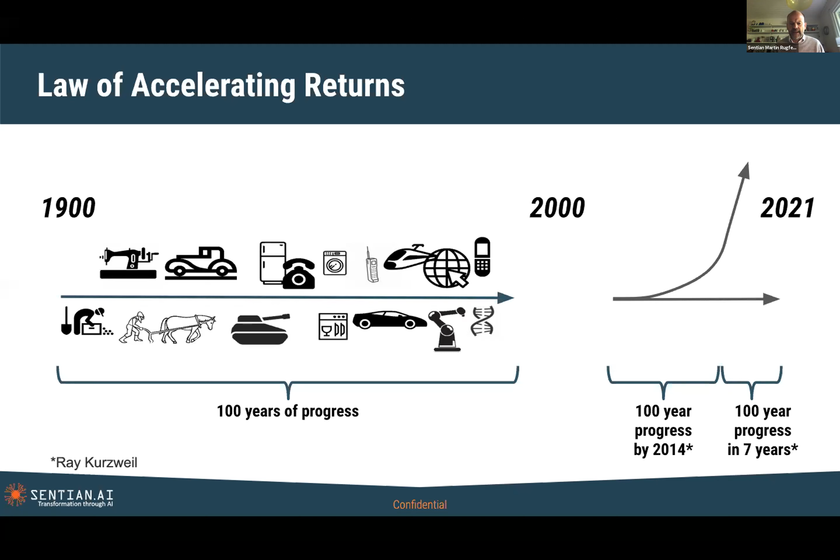So I think there is a reasonably interesting question to ask of everybody. Where will you be in 7 years' time?

And if we take an AI perspective on this, AI is now seeping into all solutions and all areas of all businesses. And there's a lot of things going on. If you take the amount of development that's made in the AI community in the US or in China. China is, by the way, one of the countries where most of these new patents in AI are being created. So it's really interesting to see how the technology is evolving.

And if you want to be at the forefront, you better get on the train and go with it.

So the theme today is smart industry and industry 4.0. And for us, industry 4.0 is really about speed and efficiency. So how does that stack up for the industry today?

Well, if you look at incumbent automation and control systems, there are some challenges. The industry is really a high dimensional place, which is non-linear, it's stochastic in its nature. There's a lot of these situations where the existing and incumbent solutions are not that. They're linear solutions, or they're not very adaptive in general. They're reactive instead of proactive and so on.

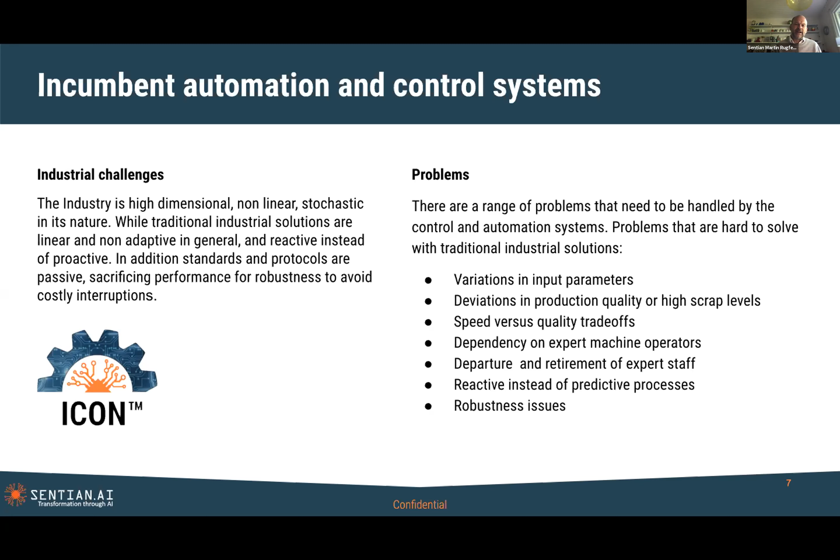And there's a lot of different challenges that these systems are working with: variations in input parameters, deviations in production quality and high scrap levels, speed versus quality trade-offs, dependency on expert machine operators, these people that really know their stuff. And that means that there are a lot of challenges that are hard for these systems to really manage.

So what we've done is we've created Icon. It is a solution that makes these industrial control solutions more adaptive to changing environments. They can tackle more complex processes, and the industry is going more towards more complexity and more flexibility all the time. So it is a challenging environment, and also combining the human and the machine elements here.

This technology is based on our scalable solution in reinforcement learning. And reinforcement learning is quite interesting because it's a technology that has been talked a lot about, but has been very hard to harness its power.

Google did with their AlphaZero products that beat the world champions in Go and so on, but we haven't seen many solutions in the industry so far. But this is what we've done, and it really works fantastically well in terms of scalability and performance.

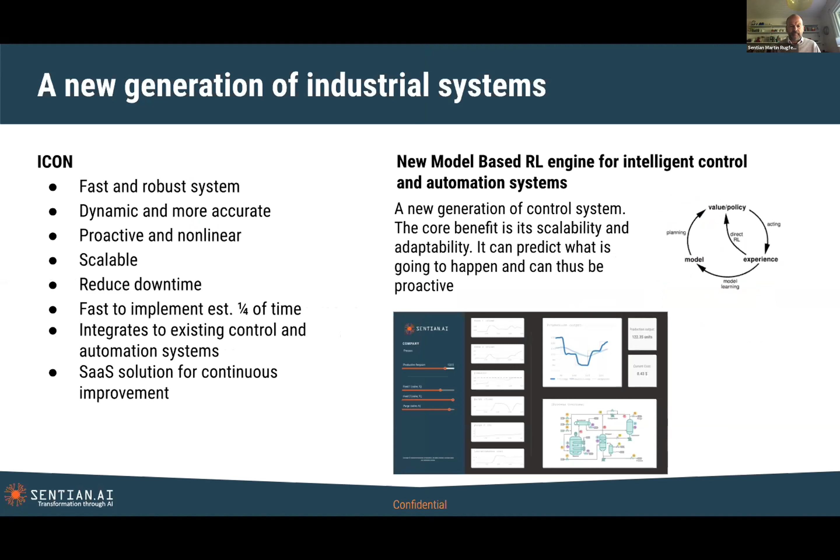What we really have is a solution that meets all of these problems. It's fast and robust, dynamic and more accurate, proactive and non-linear, and scalable. Compared to building your own solution, it's a lot faster to implement, and we have this continuous development of the process.

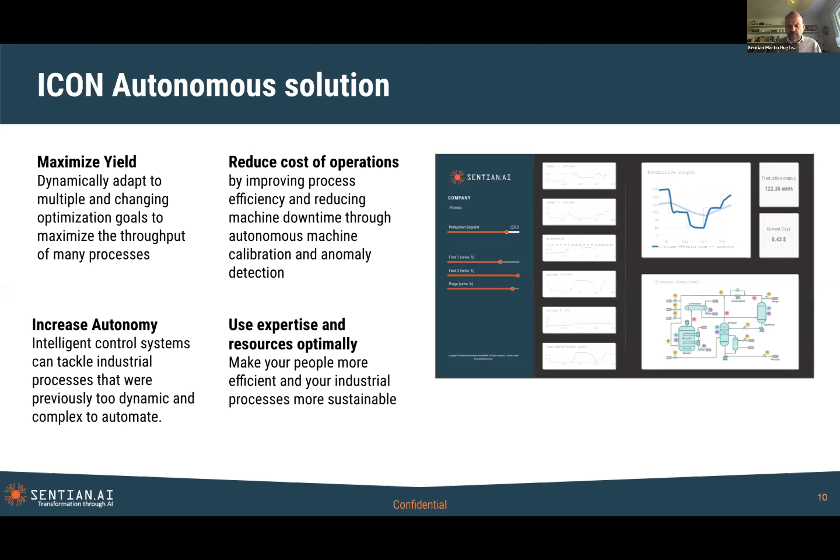So what do we use it for? Things like maximizing yield, reducing cost of operations, increasing autonomy of your machines and systems, and using expertise in a more optimal way. You can capture that knowledge from your experts and make it available, for instance.

It's applicable to many areas of industry, from making robots move more optimally, to optimizing production cells, integrating digital twins, and so on. It's possible to use it for complete plant operations—if you have a power plant and want to run it more optimally, you can use this kind of technology. It also applies to machine calibration, from making machines work a bit better on a digital level, to learning from expert operators and enhancing junior operators, for example.

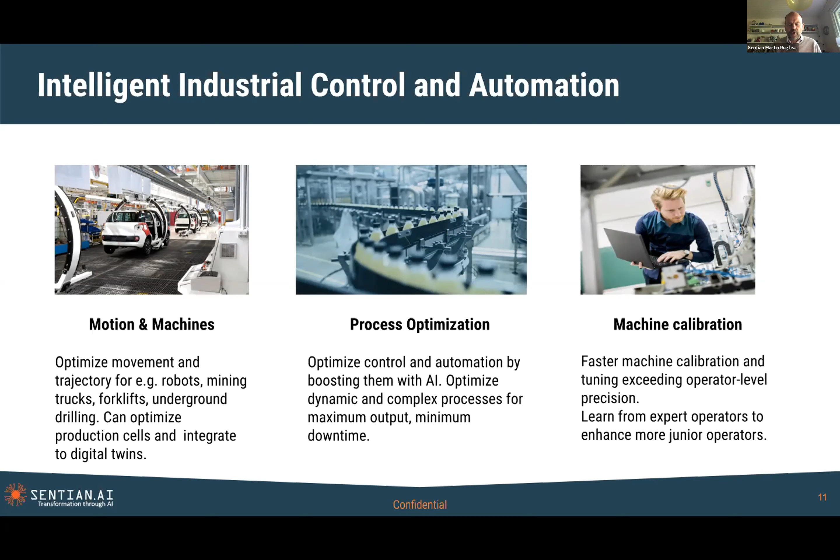The typical improvement is up to 30%, so it's quite significant. You can really use it for gaining an advantage.

I also want to talk to you about our second product, our intelligent optimization solutions. Again, there's a technical breakthrough here. At the end of 2019, we broke the current world record for nonlinear optimization in the QAP category—quite an interesting achievement on this side.

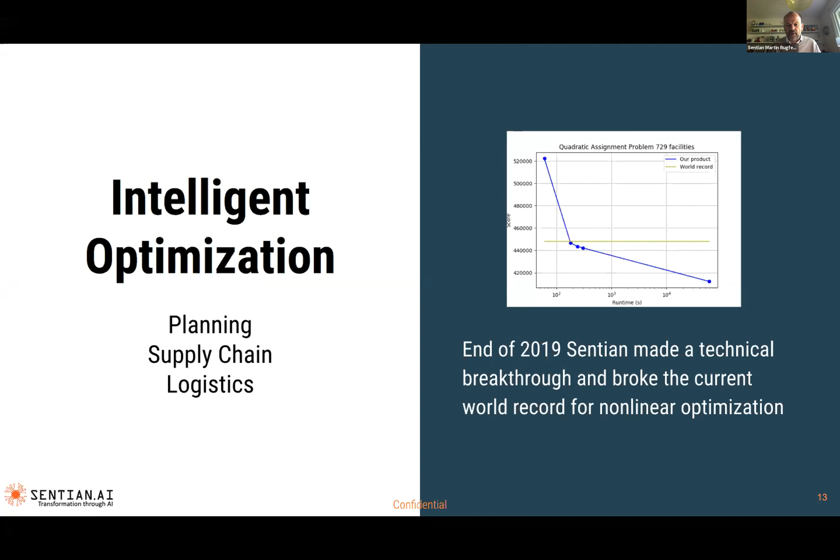In fact, the more complex the problem, the bigger the difference compared to the competition. So it's really powerful. We use this for things like planning optimization, whether it's people planning or production planning, supply chain optimization, or logistics optimization. Lots of opportunity there, and again up to about 30% improvements that we can find.

We also do predictive maintenance—not only having a suite of algorithms that can handle predictions and anomaly detection for factory floor or distributed environments, but also integrating the two former products I just mentioned, like making sure you have automated settings and calibration, or that you optimize the allocation of resources to maintenance tasks, making sure they're at the right place at the right time.

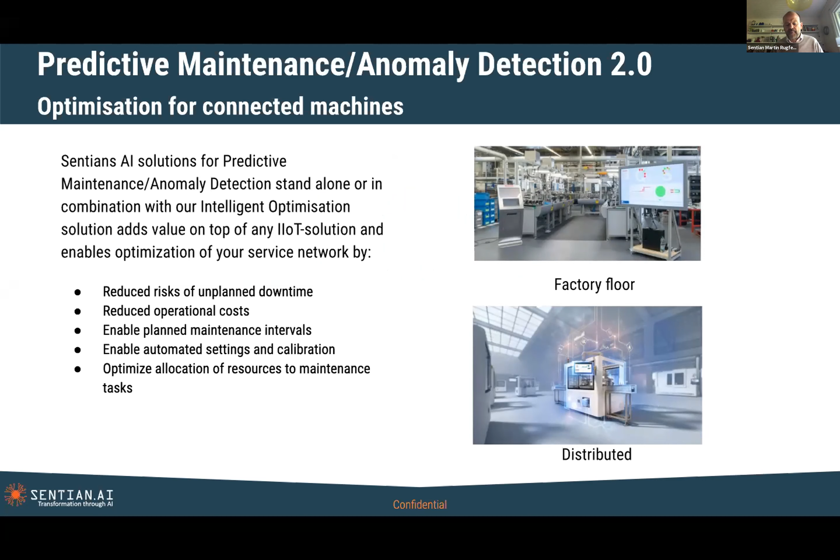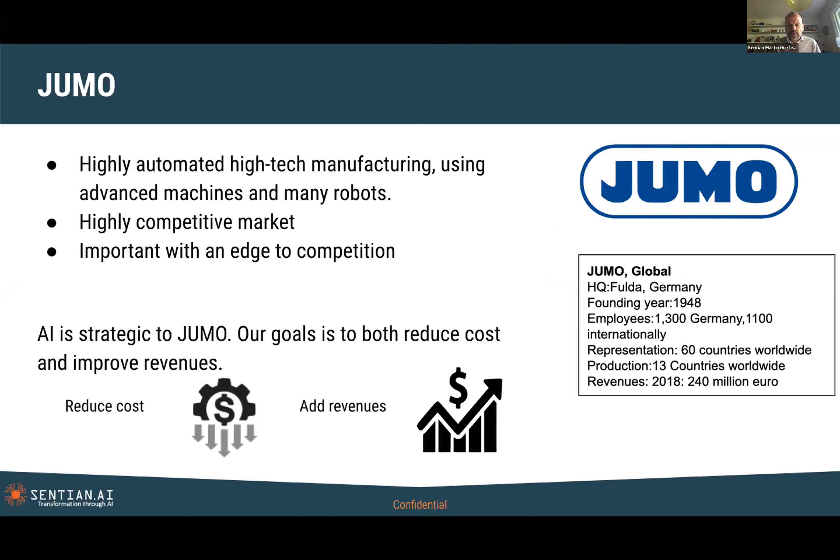I also wanted to take the opportunity to tell you about a case. This is a company called JUMO, a leading sensor and automation company. Their strategic goal was to reduce cost and add revenues when they wanted to do something in this space.

The problem they had was a manufacturing process with small but significant process variation. They wanted to see if they could add AI to their automation control system to improve sensor accuracy and overall yield of production. They had quite a few challenges: not much data, variation that drifted over time, different sources of variation, and a lag time of several weeks for the feedback loops.

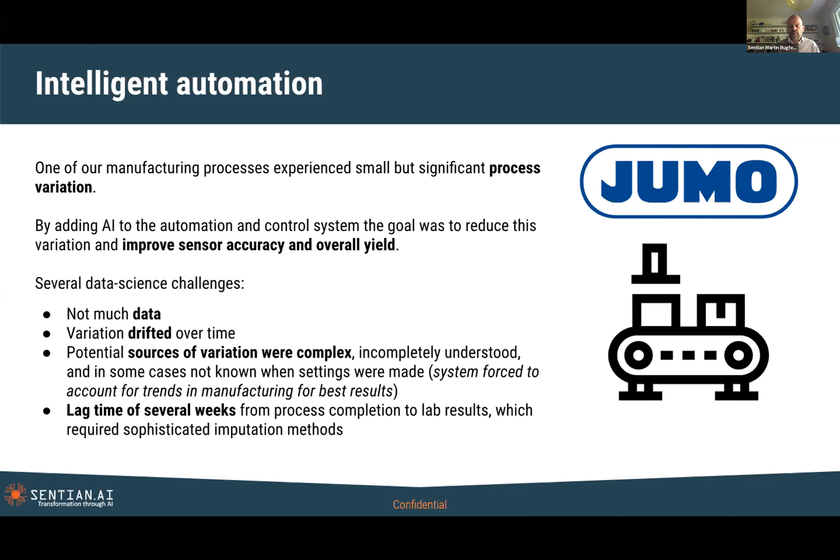So lots of issues. Having implemented this, we could increase the quality of their products by 20%—a very significant improvement. It now handles updates to the system automatically, and we've applied it to lots of different sensors.

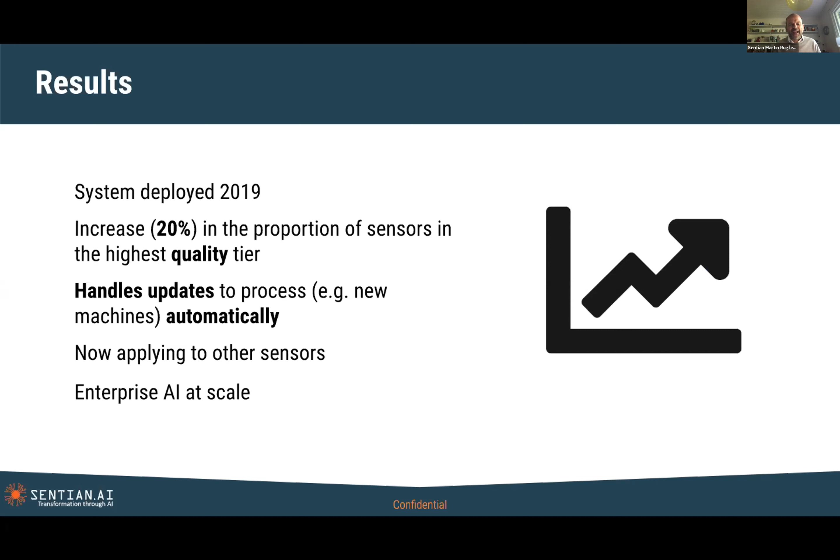So this is really what we'd call enterprise AI at scale, across the board of that company. It's applicable not only to manufacturing, but also oil and gas, automotive, utilities, paper mills, pharmaceuticals, chemicals, mining—all of these industrial areas. Lots of potential for implementation.

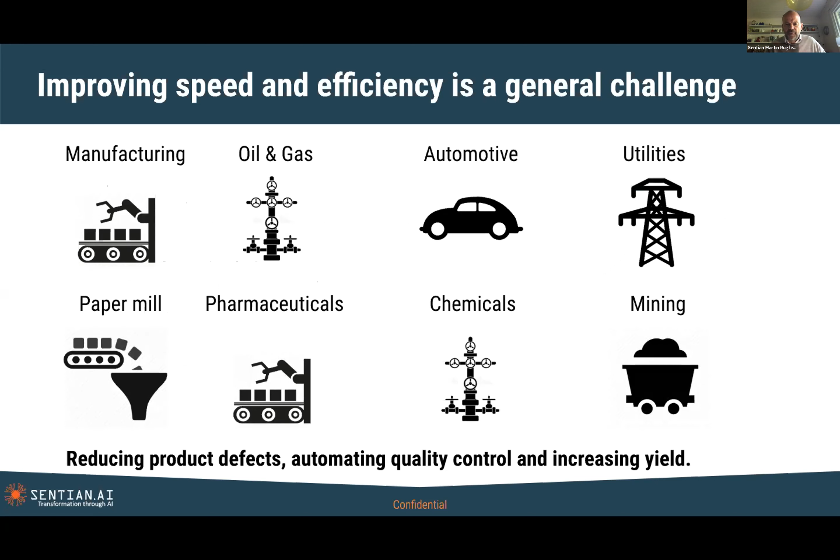So how difficult is it? The core need is that you have a challenge you want to improve, and you have some data. It's interesting that it works from small data to large data, and you can apply the system over a timeframe from weeks to a few months—it's not like these take 2 years or anything like that to implement.

Lots of potential. Finishing off by just saying, if you have a challenge, please get in touch—we're happy to discuss it with you.

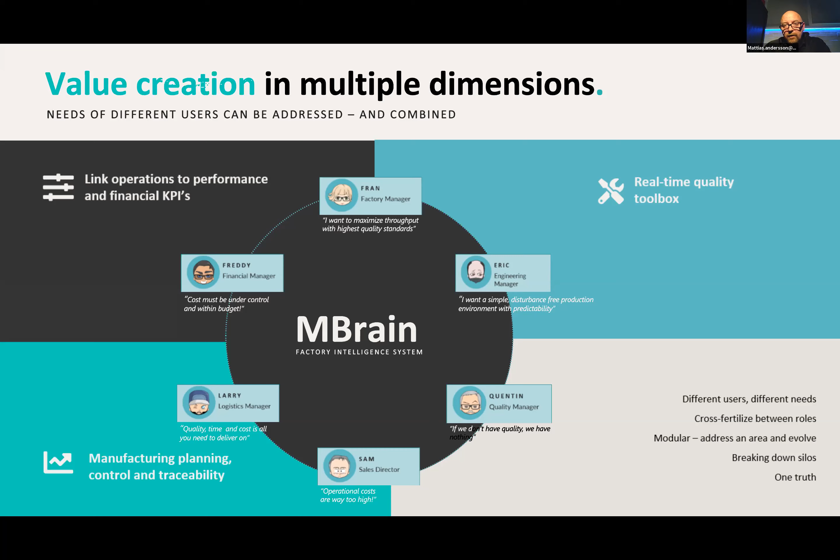So we have a solution that is extremely modular. You don't need to take it all. You can join just with the connectivity part for the machines and the planning parts, or the advanced analytics part, or the flow builder. We also have the capability within the software to create your own standard operating procedures that allow you to deploy work instructions by a push of a button. We call it push button transfer.

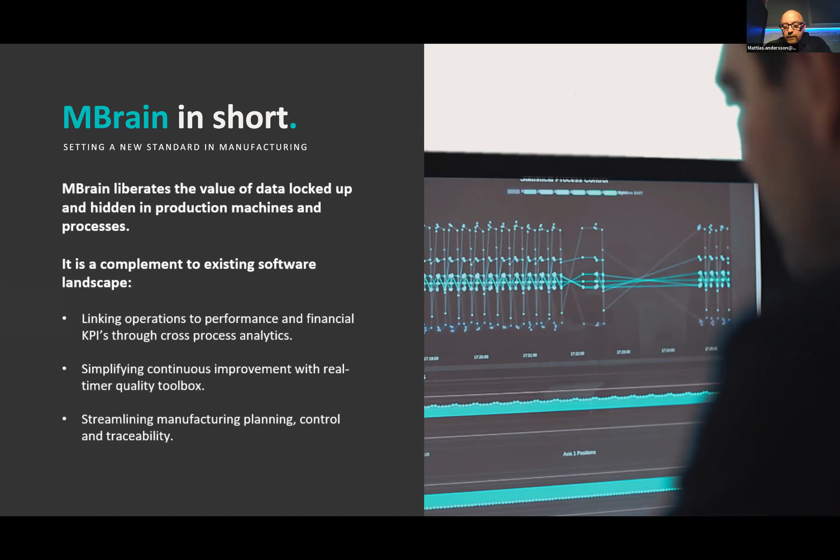Looking through the MBrain approach, you would say, well, why would the world need another MES system, a manufacturing execution system? Well, the world doesn't. The world needs a system that can create value over time and allows the user to create value using those different functions and modules.

And once again, it's completely modular. First, of course, you look through automation, with the cost of creating a business case for direct labor. But we believe in putting humans first, allowing them to interact with the system, and then creating further analytics in a simplified way. You can have the factory staff—just as Stream Analyze pointed out—make sure you don't need highly educated engineers to create data models for neural networks. You can do that inside our systems as well.

So with that, it's a fairly short presentation, but I'll be happy to answer any questions or provide a personalized demo for you and go through the features and functions of MBrain. And once again, MBrain supports the product's lifecycle. It's not just about manufacturing, it's also preparation. We have design modules, and we have end-of-life features in it as well.

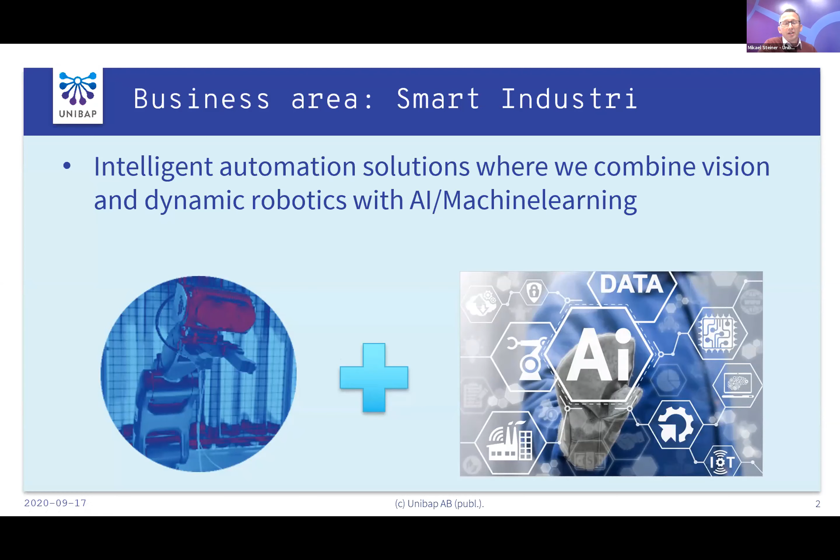We actually work with several things within Unibap, but today I'm going to focus on our business area for smart industry. So what is that? We make what we call intelligent automation solutions, and it's pretty simple - we combine vision with dynamic robotics and AI machine learning. What we're trying to achieve is to create abilities to mimic human behavior.

Is it also a complex article? Let's say it's assembled - is it assembled correctly? Have you put in all the contacts or pins in the right direction? Or let's say a medical syringe - is it filled up properly? Everything is pretty easy to achieve with artificial intelligence.

What we heard earlier, there's a lot of open source algorithms, and our knowledge and experience so far is that it's rather easy to achieve this in the lab environment with perfect conditions. The hard part is the reality when we do it empirically in a production line at a customer facility.

But there are also more things we can do without hard coding a robot or a vision interface, such as identification - is it the correct article coming down the line, or the position of an article if you have a dynamic system to pinpoint a robot gripper to a moving target? If we want to pick things, we can combine it with an area camera that makes an initial quality assessment, positions the detail, and we're also picking it. We're picking details down to 2.5 millimeters at the same time we do this quality assessment. So that's really interesting to see when we combine these different abilities in one and the same system.

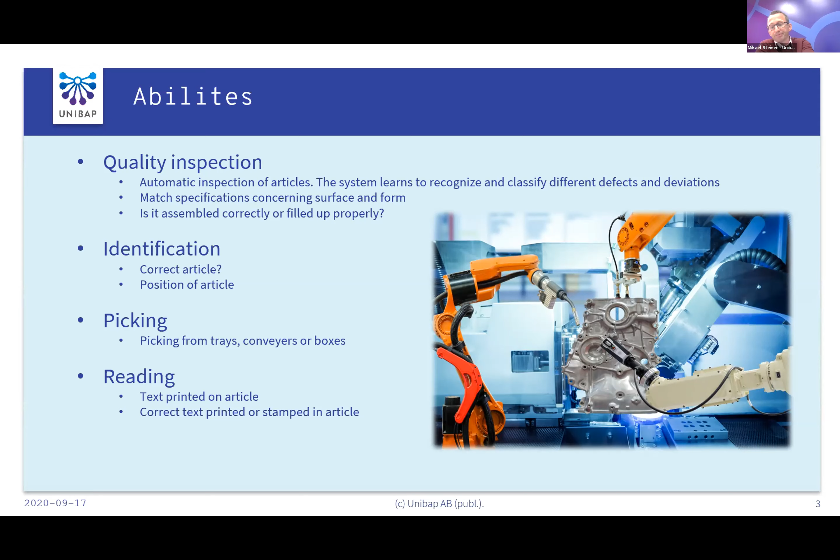So how is it installed? We use fixed mounting systems - we could just hook it up to your production line. We add a vision system, we add lights, try to seal it off a little bit. But it most comes to life when we combine it with robotics, because if you mount the vision system on a robotic solution, we can guide the robot to check and hover around a certain article, even a complex article, to see it from several different angles.

Another alternative is to let the robot grip the part and show it to a fixed camera. This is interesting - let's say you already have a production cell, you might have the robot gripper and everything around it, and you have a few seconds of cycle time left. Why not use that for quality assessment? And when it comes to a full robot cell, why not let this cell do more than it already does? So it's a really powerful solution, extremely flexible.

If we have really difficult systems or issues to solve, we prefer enclosed vision boxes, like in a cabinet, where we have absolutely no additional variables to take care of. And these could be robot fed or manually fed.

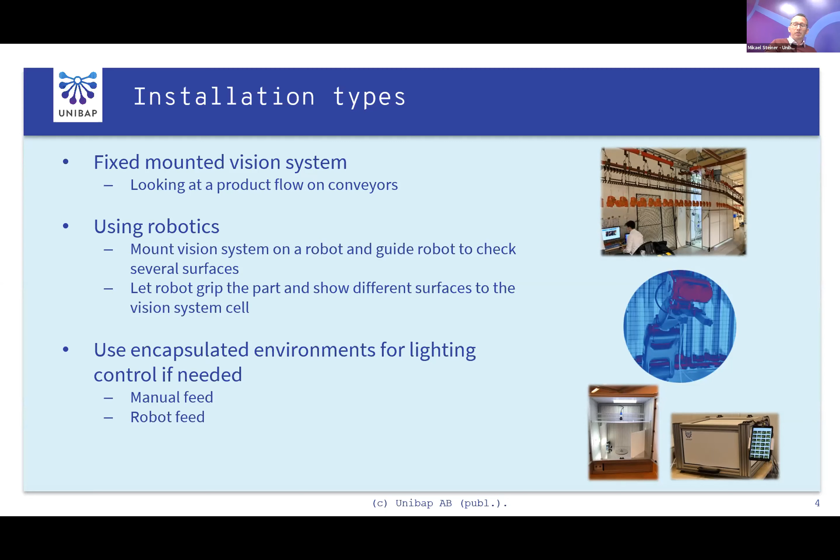Really interesting results can be achieved out of this. This is a principal view of how it works. Regardless whether it's a robot cell or fixed vision, we communicate with a PLC or a production system, get notified. What is it? Our AI in the middle assesses the object and does all the checks that we need to do on it.

A fraction of a second later, we communicate with an offloading system. It could be manual, so the operator sees, well, don't touch that, that's a faulty unit. Or we communicate with an automatic offloading cell.

We check each and every produced unit, and it's actually when you start to measure everything that we can measure true quality. To our knowledge, most customers that we work with have actually seen that their real quality might not live up to their expectations. And when you know your real bottlenecks or issues and how often they occur, you can start to pinpoint the root cause of it.

And the ultimate goal with this is to have fewer defects reach the end customers or further down the line for further processing in that plant.

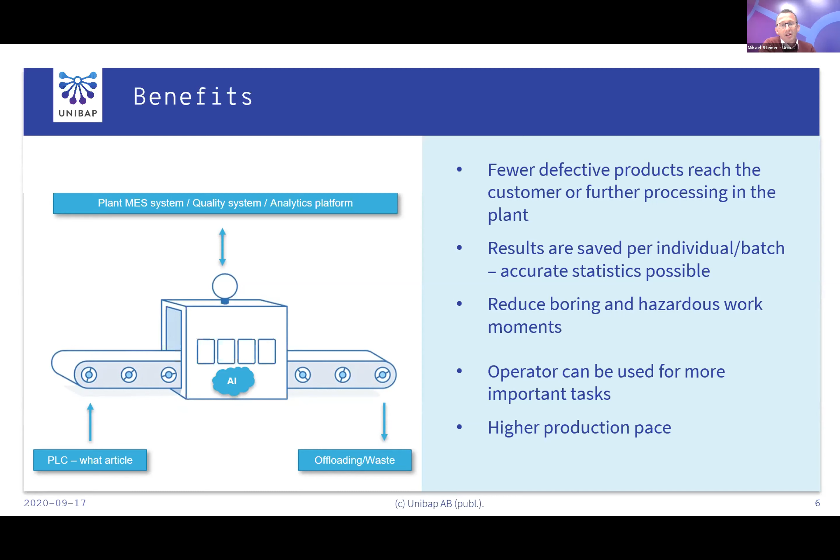So let's look at our real-time artificial operator in use with a high volume production. This is a system that makes real-time live decisions, communicating with a fully automatic offloading cell. We're assessing about 2.5 million articles a year.

The proven facts of this is that we now produce way less quality defects, or at least they don't reach further assembly down the line, and it enabled a higher production pace. Not to mention that this system occupied about 7 people with offloading and quality assessment. So these operators now can perform different tasks in the plant.

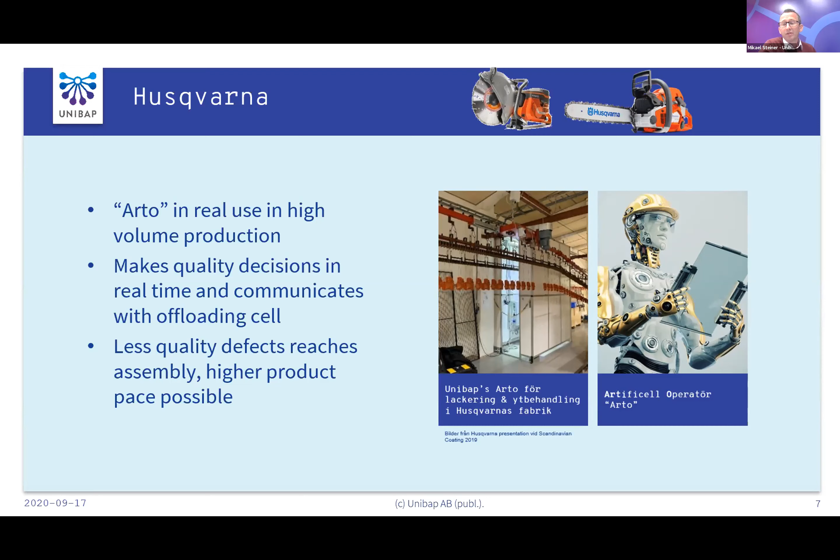So let's look into it. What is it that we can actually find? Let's say you have an industrial paint shop. Let's identify what's coming up. On the surface inspection, we can see running, drops, blisters, scratches, unpolished areas. We categorize them and save the results.

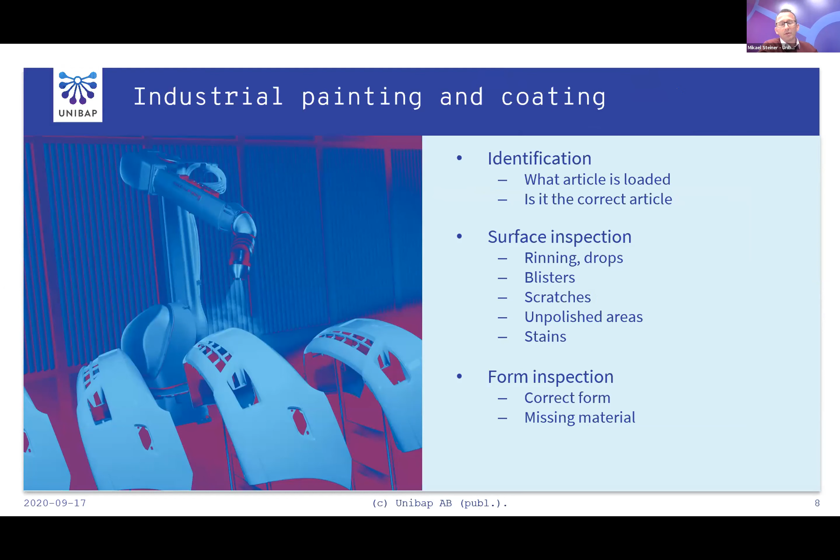We can also do a form inspection directly from the foundry. How does the cast look like? Is it correct? Is there any missing material?

This is of course applicable to all kinds of machine components. This could be automotive parts, an undercarriage for a truck, all critical components with a high degree of machining before. Is it threads? Have you drilled through? Is the hole positioned correctly? Are there micro scratches? Are there chips? Cracks in the material? At the same time, we do a form inspection.

We could check the details and also edges and corners, really enabling you to know that the defects are left in the scrap bin instead of reaching further production.

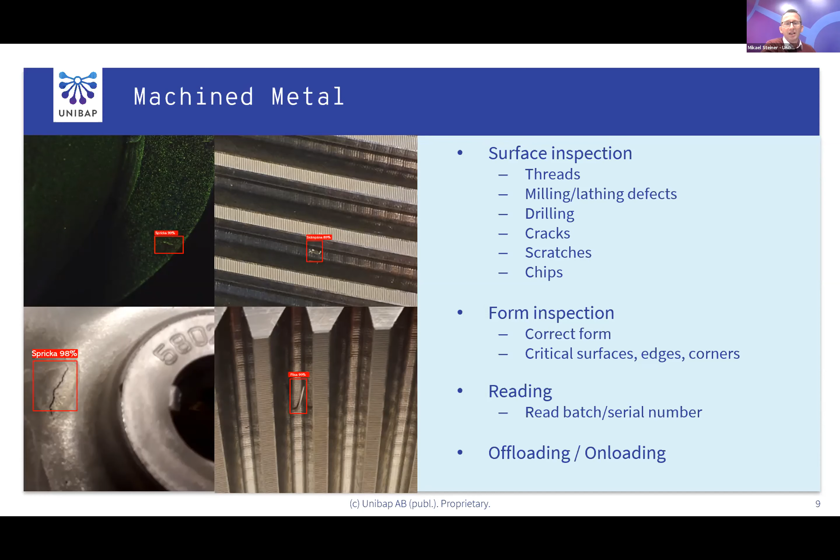Welds are another useful area where errors really pop up, and also very interesting to combine with robotics. Let's preload the CAD shape of the object that you're assessing, and the robot could follow all the joints and automatically do an assessment of it.

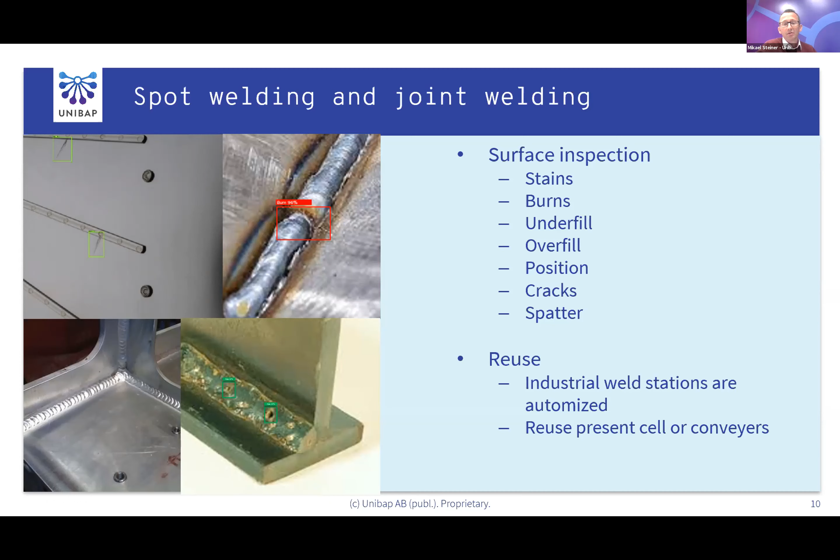Finally, I also like to show this is not just applicable for machined metal and electronics parts. AI doesn't hook to fixed edges. It's excellent for biological or uneven surfaces, complex surfaces. So in this case, we work with somatic embryos, doing a fully automated picking and quality assessment, removing manual planting labor, lowering production cost, and actually doing good for the environment. We're increasing replanting all over the world.

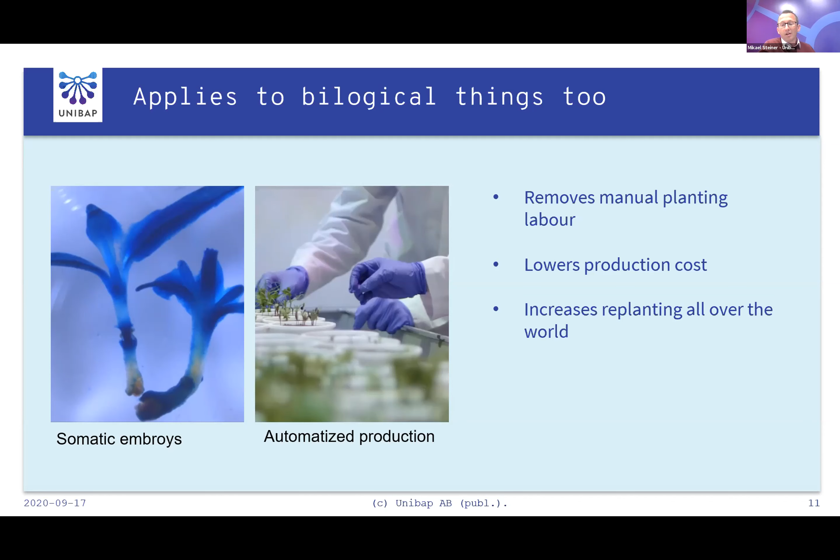So to sum it all up, this kind of system can be used as an autonomous operator, an artificial operator, and it can also use an operator support system if you have a slower process. Let's have the system notify the operator, hey, I actually think you have a defect, and the operator has the final say whether it's a defect or not and can approve it or not. So this is what we do.

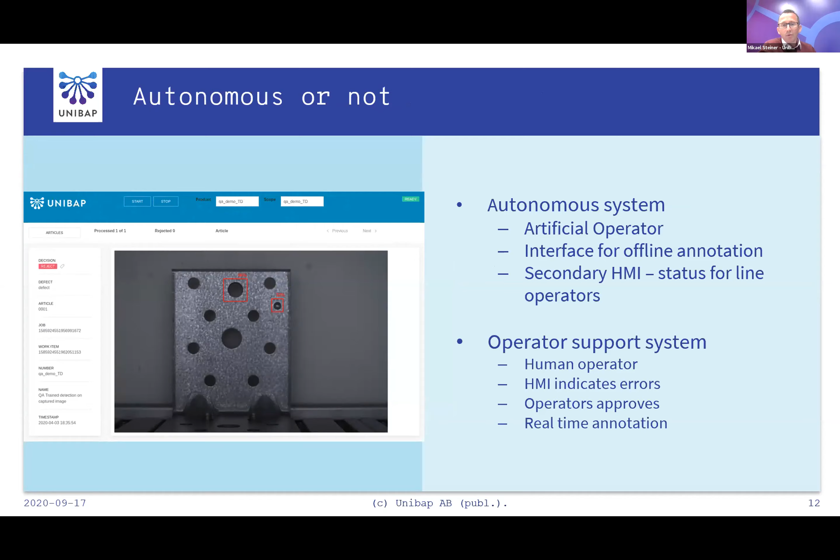Thank you very much, Mikael. So you've got a question here. Okay, what is the biggest challenge when implementing smart factories with AI learning?

When it comes to AI, what differs AI training from traditional programming of a robot cell is that we need samples to train from. Early on, we had issues finding defects, because we needed to train on defects, and a good production facility didn't produce that many defects, so it could take time, and that was a great challenge. Now we also train a lot on complete or correct units. That has been a great improvement for training the system, having it pre-trained before. I would say that is one of the biggest challenges.

The second biggest challenge is the reality. Back in the lab, you have perfect light conditions, no vibrations, no one messing with your stuff. Out in reality, everything happens - I'd say we've seen it all. That is a big thing. You need a super accurate algorithm doing 24/7 work in very harsh environments, and that's really the key to making it work, I'd say.

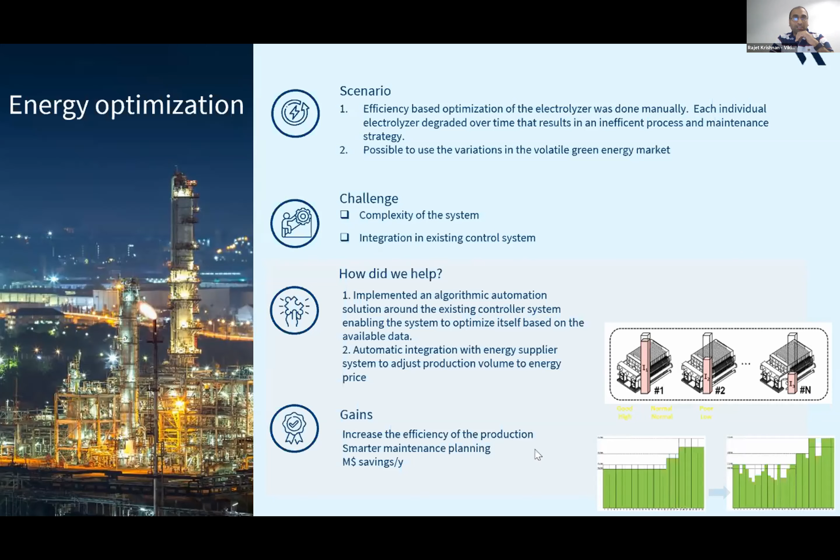And what did we learn from this? What we learned is that building smart applications for the smart factory, like predictive maintenance or control or optimization, in a scalable, reliable way, is extremely challenging, especially if the domain experts, the people who are in the plant, their knowledge are not integrated into the solutions. This is because we realized that many of these domain experts have to analyze the data, they have to understand the data in order to contribute to such solutions in the first place.

So we realized that these domain experts, who are not necessarily data scientists, can spend a lot of time cleaning the data, preparing the data, analyzing it, annotating it, or describing the data to an algorithm and getting to their insights. Once they have their insights, deploying algorithms based on the insights was another super hard challenge, and troubleshooting it, monitoring it and maintaining it was another complex activity. And what we started realizing is that there would be several millions of euros of losses in terms of opportunity cost, several man months and weeks of man hours lost because of the complexity of big data analysis and deployment of solutions.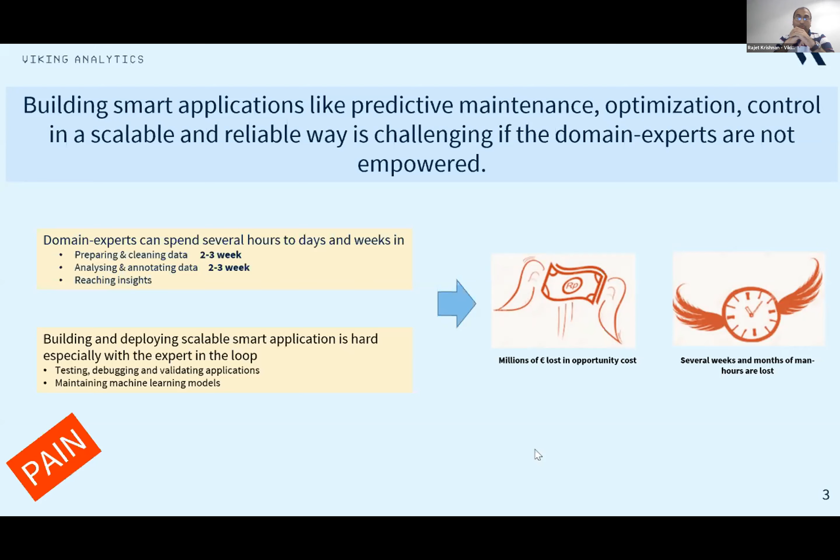And this is how we started building our product called MultiViz. How does MultiViz help smart factory solutions and smart manufacturing? MultiViz helps organizations and their domain experts to start all the way from raw data, raw sensor data, helps them to explore it, analyze it, annotate it, describe it in some sense, and then get to insights very efficiently and quickly. Once they have the insights, we have a deployment tool which helps to operationalize these insights as smart applications.

On top of that, many of these machine learning based applications require continuous testing, verification and debugging, where typically an expert may also be involved, because debugging such applications involves debugging the data as well. Enabling them in this full journey of starting from raw data to an application and testing the application is really what our tool is capable of doing.

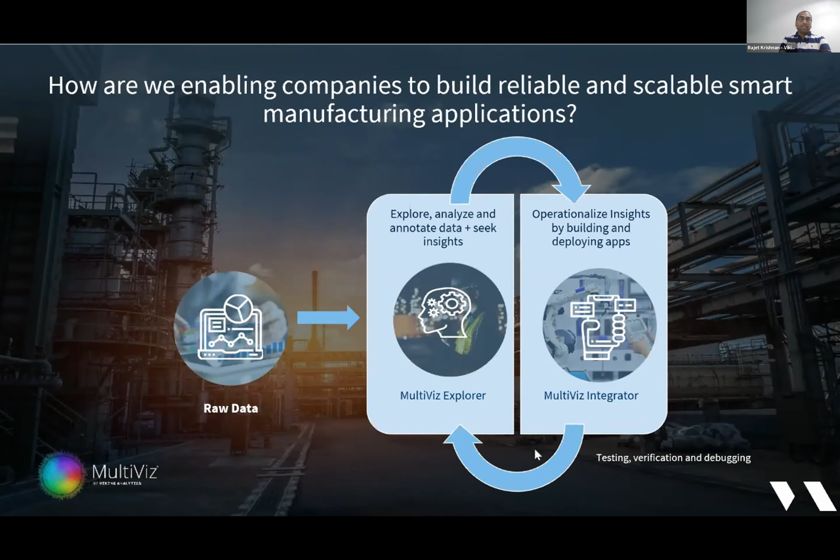So today, MultiViz is, as we call it, a self-service platform. It's not completely self-service in the sense of being a completely SaaS solution yet, because we are still in early stages of development, which means that we work with our customers with the tools that we have, but the vision is to go fully SaaS with minimal support from our side. But today, it's a bit of a different story.

But enabling them to visualize the data, prepare the data, analyze and annotate, describe the data, and once we have the insights, we assist organizations and their domain experts to build models, deploy models, and maintain them. This is the full journey we enable our customers to perform.

And there are a multitude of applications that we work with, including root cause analysis, scrap analysis, machine learning deployment, predictive maintenance, predictive quality control. One aspect that really makes us stand apart from many other solutions out there in the market is that, using this software platform, many of the domain experts are able to build expert-specific applications themselves, maybe for vibrations, maybe for valves, additive manufacturing, so on and so forth, which they can build and also deploy.

So, because of the solution and the platform that we have in hand, we are able to support extremely complex deployments, extremely complex smart factory implementations. One example here is from Schaeffler, a big company, a customer of ours, who wanted to implement proactive and predictive maintenance from millions of data points from thousands of machines across the world. They used our tools to annotate the data, to describe the data, and build solutions for minor stoppages, anomaly detection, predictive maintenance, and predicting health trends of their assets, so on and so forth.

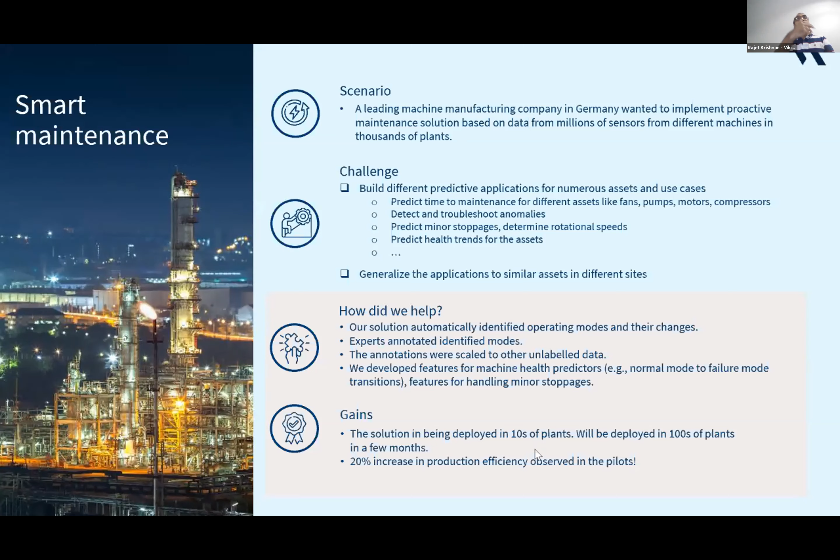Another example I can tell you is from the context of metal pouring in foundries, where our tools were used for deploying a smart operator which would operate the metal pouring instrumentation purely without any human intervention. This solution has now been rolled out in at least 3 foundries. By the end of this year, we anticipate that it will be rolled out to 10 to 15 foundries. So just putting the power of data into the hands of folks who actually understand it can truly transform the industry, and this is exactly what we are seeing.

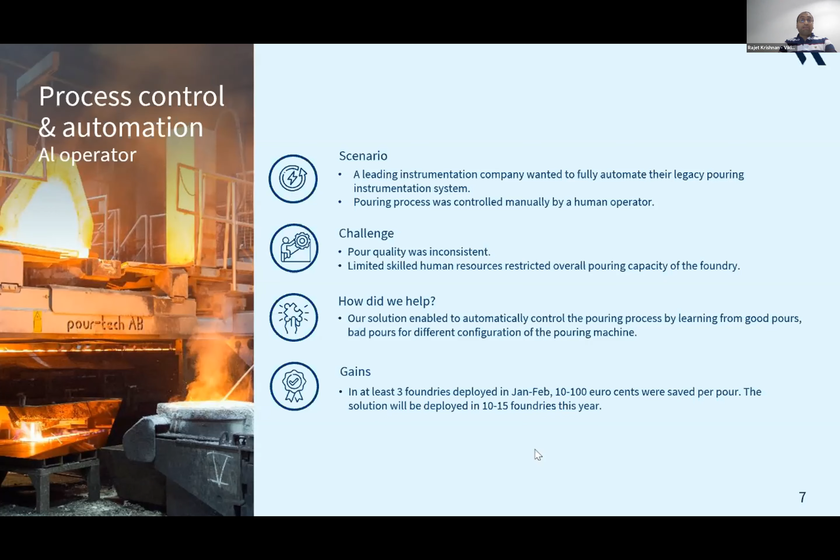And this is what we believe in, and this is why we are seeing this tremendous traction, even during these extremely difficult COVID times, because we enable experts who understand the data to actually transform it and commercialize it into an application at scale—being able to build industrial solutions at scale with our help, and with the help of their in-house data scientists.

So we have about 16 customers today, and our customer group is definitely increasing, and we are seeing a lot of traction in the market. So this is what we do, and I'd be happy to answer any questions you may have. Thank you.